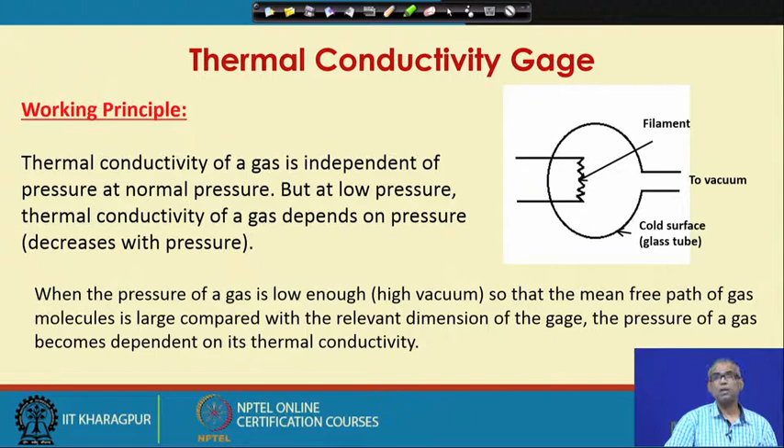Let us look at this diagram. So, we have a filament which can be heated by supply of some energy. Now, this is kept, let us say, within a glass chamber, and to that glass chamber I apply the vacuum. That means, this is connected to the gas source whose pressure I am going to measure.

So, if this is the filament which is being heated by a supply of constant energy input, this is my hot surface. Now, the glass tube will work as a cold surface. So, there will be heat exchange between this hot filament and this cold surface.

So, a heated element supplied with a constant energy input will assume an equilibrium temperature when heat input equals heat loss by conduction plus radiation. So, as I told you, there is heat exchange between the filament and the cold surface of the tube. Filament works as a hot surface and the surface of the tube is the cold surface.

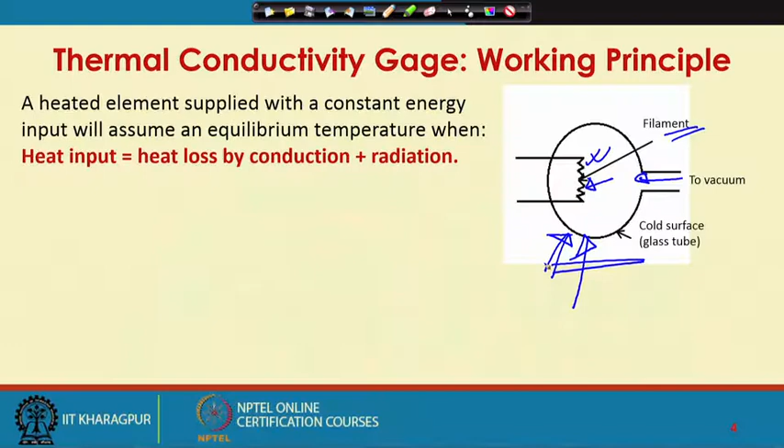So, conduction heat loss from a heated conducting wire or hot thin metal surface is dependent on the thermal conductivity and composition of the surrounding gas. Thus, for a given gas, the equilibrium temperature of a heated conducting wire or hot thin metal surface is a function of pressure. I can easily measure the temperature of the wire by, say, a thermocouple or by a bridge circuit.

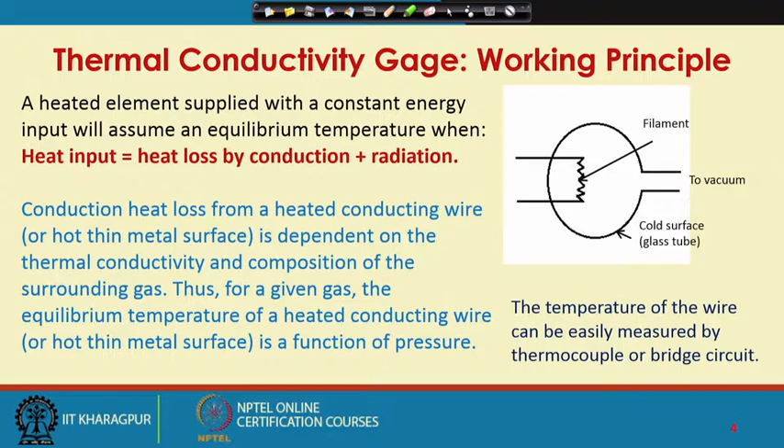So, the basic principle in a nutshell is as follows. In a glass chamber, if I heat a filament with some constant energy source, the temperature that the filament will assume at equilibrium will depend on the thermal conductivity of the gas. Now, if I measure the temperature of the filament, I can relate that temperature measurement with the gas pressure, and the temperature measurement can be done very easily.

Let us say I can measure the temperature of the hot filament by a thermocouple, which may be welded to the hot filament or the metal surface which is being heated up, or I can also make use of a Wheatstone bridge to find out the change in resistance due to change in temperature of the filament. So, either way I can relate the temperature of the filament upon heating with the gas pressure. So, this is the principle all the thermal conductivity gauges use.

So, let us talk about some basic characteristics or features of thermal conductivity gauges. The range of such gauges is 10 to the power minus 4 to 1 torr. So, a pressure more than 1 torr is not measured. Calibration depends on the gas being used. This is because the thermal conductivity is also a property of the gas we are talking about. So, the calibration will depend on the gas whose pressure we are measuring.

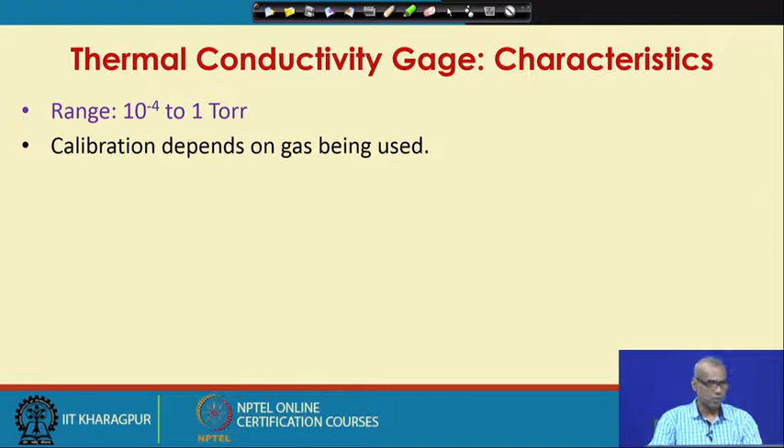If radiation heat loss is high, then the sensitivity of the gauge may be poor. So, what we mean is, if the radiation heat loss is a major part of the total loss, then the sensitivity of the gauge may be low. Radiation heat loss may be minimized by using surfaces of low emissivity.

A solid support is needed for mounting the heated filament, because you need to place the filament within, let us say, the glass tube or the enclosure to which the gas will be admitted, whose pressure you are going to measure. So, the filament needs to be mounted within the tube or within the enclosure. So, normally a solid support will be required for mounting the heated filament. Heat conduction loss through this support is another source of error.

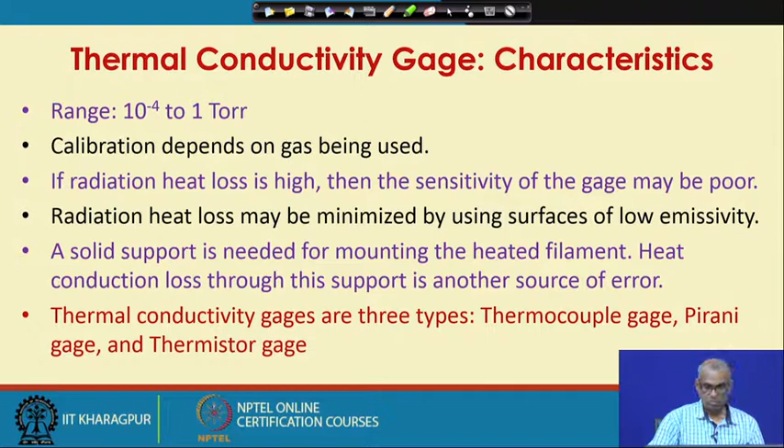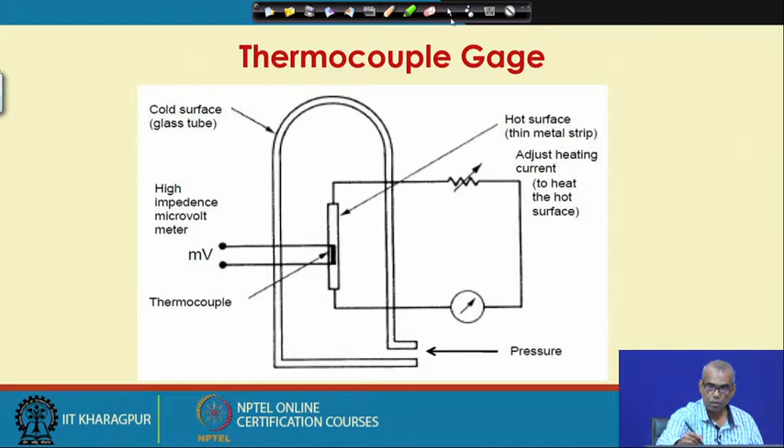So, the hot surface in a thermocouple gauge is a thin metal strip whose temperature may be varied by changing the current passing through it. For a given gas and heating current, the temperature assumed by the hot surface depends on pressure. Temperature of the surface is measured by a thermocouple welded to the hot surface. The range of a thermocouple gauge is again 10 to the power minus 4 to 1 torr. Measurement may be affected by ambient temperature. This has to be taken care of. Metal surface of low emissivity is used to reduce the effect of radiation.

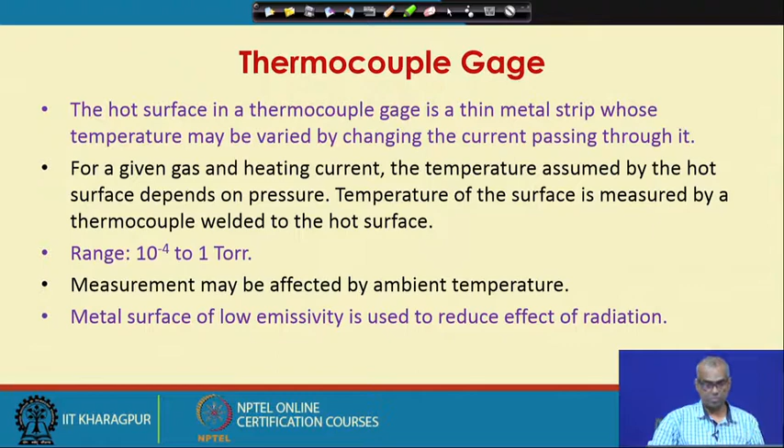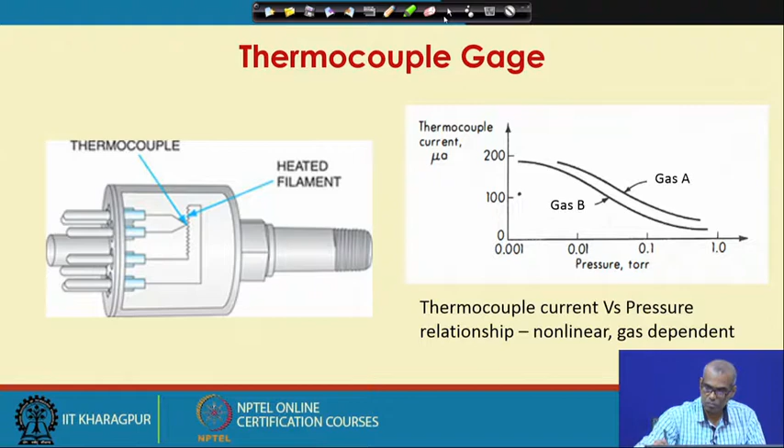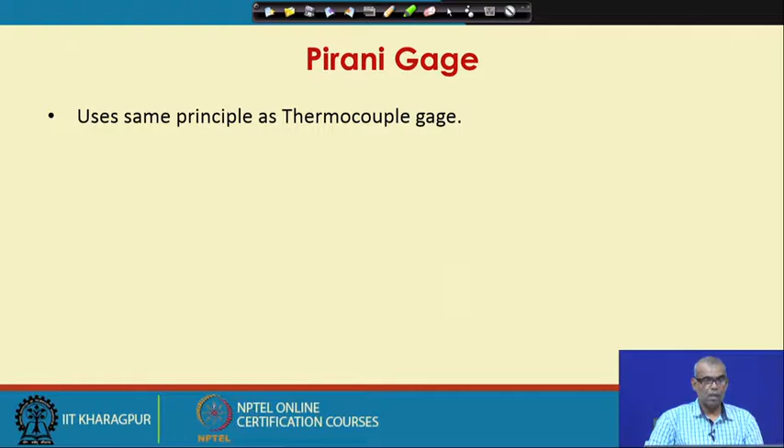Let us talk about Pirani gauge now, another thermal conductivity gauge. Pirani gauge uses the same principle as thermocouple gauge. The resistance element in a Pirani gauge is a coiled tungsten. You can also take platinum or nickel. So, the resistance element in a Pirani gauge is a coiled tungsten wire or platinum wire or nickel wire supported inside a glass tube through which the gas is admitted. So, the gas admitted is the vacuum source.

Current flowing through the heating element heats it to a temperature depending on the gas pressure, because gas pressure will determine the thermal conductivity of the gas. The resistance of the element changes with the temperature and this change in resistance causes a bridge unbalance. So, the change in resistance can be measured by Wheatstone bridge principle. Initially, you establish the null point and then due to change in temperature, resistance of the filament changes. So, that causes the bridge to go unbalanced. Thus, the bridge unbalanced current is a measure of the gas pressure.

So, let us look at it once more. The resistance element in a Pirani gauge is a coiled tungsten wire supported inside a glass tube through which the gas is admitted. Current flowing through the heating element heats it to a temperature depending on the gas pressure. The resistance of the element changes with the temperature and this change in resistance causes a bridge unbalance. Thus, the bridge unbalanced current is a measure of the gas pressure. So, here the function of heating and measuring temperature are combined in the single element.

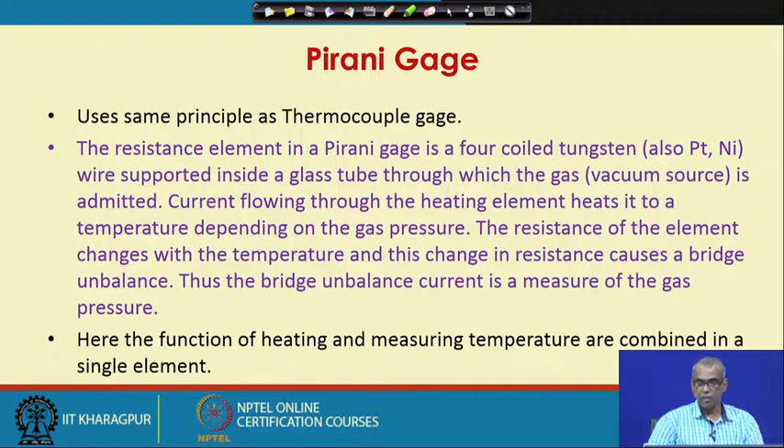So, I am heating up the resistance, I am heating up the filament, say tungsten filament or platinum filament or nickel filament, by sending current through it and also measuring the change in resistance by the Wheatstone bridge principle. So, in the Wheatstone bridge, in one arm I can attach this tungsten or platinum or nickel wire which works as a Pirani gauge. So, the function of heating and measuring temperature are combined in a single element.

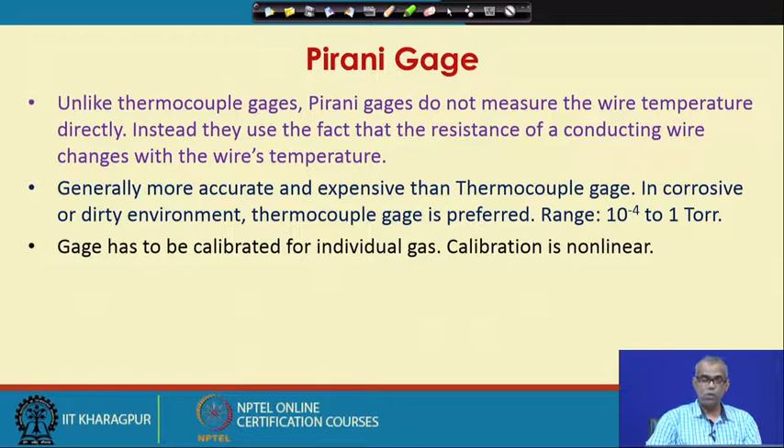Unlike thermocouple gauges, Pirani gauges do not measure the wire temperature directly. Instead, they use the fact that the resistance of a conducting wire changes with the wire's temperature. Pirani gauges are generally more accurate than thermocouple gauges, but also more expensive. That is why in corrosive or dirty environments, the thermocouple gauge is preferred over the Pirani gauge. Again, the range is 10 to the power minus 4 to 1 torr.

The gauge has to be calibrated for individual gas, because thermal conductivity is a function of the gas we are talking about. So, different gases will have different thermal conductivity. Calibration is non-linear. Temperature compensation is provided. The heated wire or the measuring element is connected as one leg of a Wheatstone bridge, and an exactly identical element is connected as another leg which is exposed to ambient temperature and works as a compensator. A similar concept of temperature compensation we have also seen in case of strain gauges.

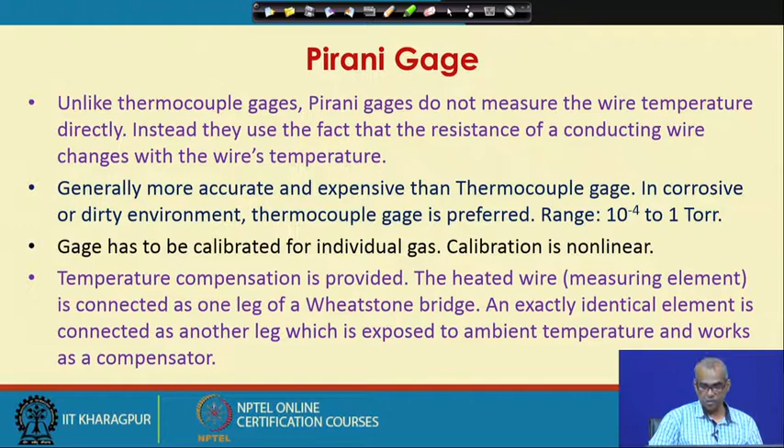So, this is a schematic of Pirani gauge. You can see the coiled tungsten wire or platinum wire or nickel wire supported within the tube. So, this goes to the electrical circuit for heating up the coil, and the gas is admitted or the vacuum source is connected. Now, this is connected to one leg of the Wheatstone bridge.

Now, initially you balance the circuit, so there is no unbalanced current in the bridge. Now, when the gas is admitted to the Pirani gauge, the temperature of the measuring element will change. That will cause a change in the resistance. So, that will cause an unbalanced current in the circuit, and that will be a measure of the unknown pressure or vacuum.

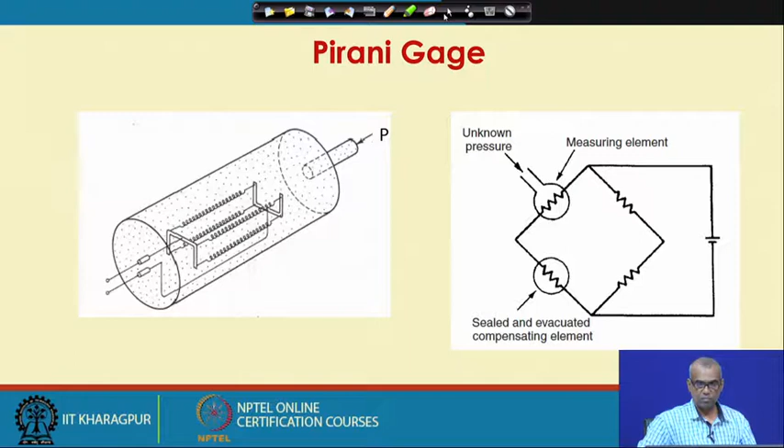So, this is just another diagram for Pirani gauge. How will you measure the change in resistance using the Wheatstone bridge principle? So, this is the measuring element or the measuring cell to which the vacuum source is connected, and this is the compensating cell. So, they are in the adjacent arms. So, this is the output voltage, which gives you indication of the pressure of the gas.

Dry nitrogen gas is commonly used as the test gas for Pirani gauge calibration, although any dry inert gas may be used. So, this is a plot of bridge unbalanced current versus pressure. When you apply different pressures to the Pirani gauge for a particular gas, you see that the relationship is non-linear. This is shown for a typical gas A, let us say air; for some other gas B, it may be something like this. So, this depends on the particular gas. So, the calibration is non-linear as well as gas dependent.

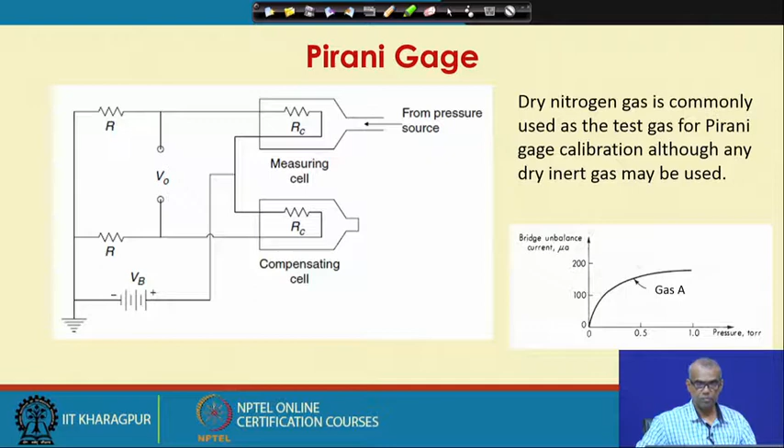There are two common modes of operation for a Pirani gauge. We can feed the filament with constant current and measure the voltage across it, or we can vary the current to keep the voltage constant. Both come from the principles of Ohm's law. So, one mode of operation is that you supply a constant current to the filament and measure the voltage across it. The other one is you vary the current to keep the voltage constant. So, these are two common modes of operation for Pirani gauge.

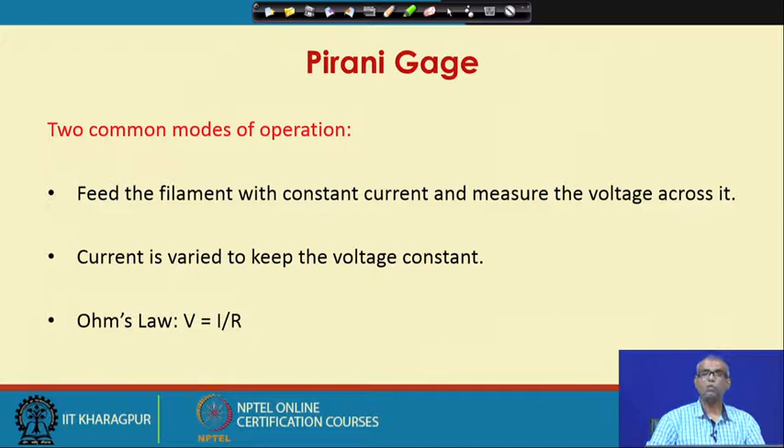Finally, let us briefly talk about thermistor gauge. The thermistor gauge operates on identical principles to the Pirani gauge. The only difference is that a thermistor gauge uses semiconductor material for the heated element instead of metals. A Pirani gauge uses hot filaments made of tungsten wire or platinum wire or nickel wire, whereas a thermistor gauge uses semiconductor material instead of these metals. That is the only difference.

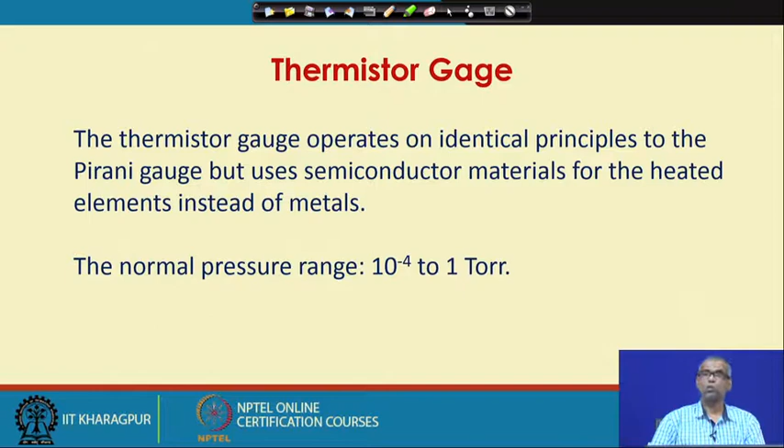So, the difference lies in the material of construction of the filament or hot surface. In case of Pirani gauge, it is a metal which is either platinum, nickel or tungsten. In case of thermistor gauge, it is a semiconductor material. Everything else is similar. Again, the normal pressure range is 10 to the power minus 4 to 1 torr. So, we will stop our discussion on thermal conductivity gauges here. We learnt about 3 different thermal conductivity gauges: thermocouple gauge, Pirani gauge and thermistor gauge.